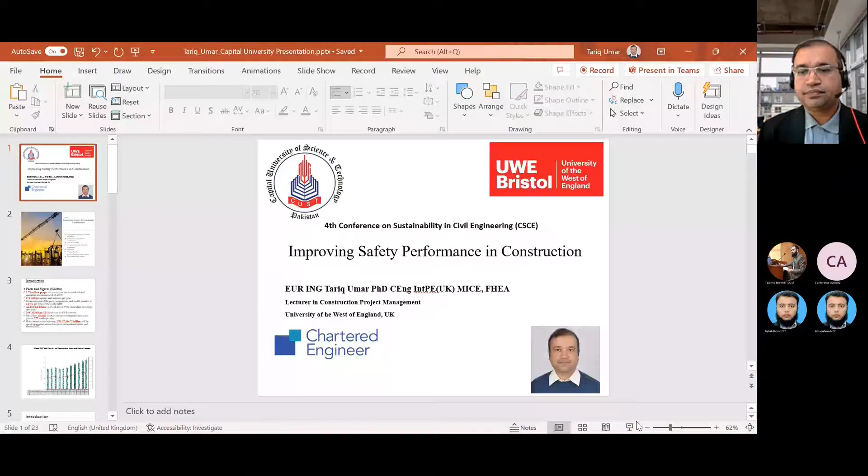So ladies and gentlemen, and the conference organizer, thank you very much for giving me this opportunity to present some of my thoughts in this prestigious conference. I'm going to talk about safety in construction, and the title of my presentation is Improving Safety Performance in Construction. My name is Dr. Tariq Umar, and I'm a lecturer in construction project management at the University of West of England.

So the content of my presentation will include the introduction and the importance of safety and health in construction. We'll try to look at the different causes of accidents in construction. Then I will try to cover the cost of accidents. Then we'll briefly cover the occupational safety and health regulations. Two topics related to heat stress and physical health of workers will be covered. And then later I will cover safety culture and safety climate. And then at the end, we'll have the conclusion and a brief question and answer session.

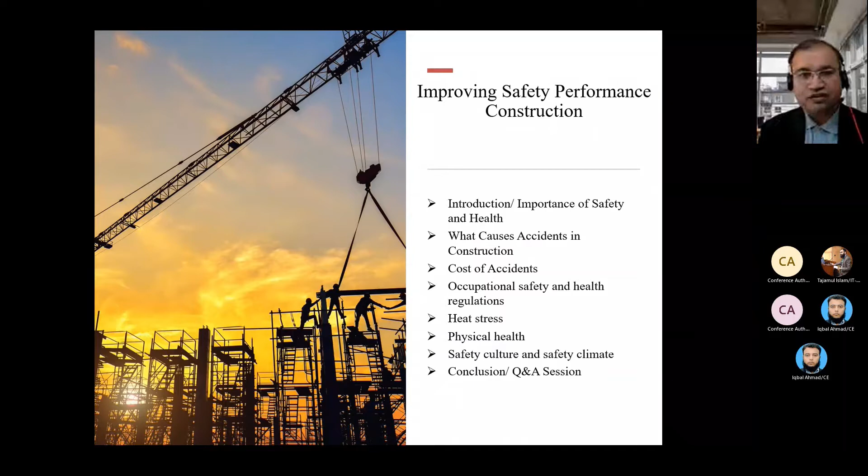So let's look at some global facts and figures related to health and safety in different sectors. If we look at the statistics of the International Labour Organization, that revealed that 2.78 million people die every year due to work-related accidents or diseases. If we look at the injuries, those are basically 374 million per year. If you look at the economic cost of poor occupational safety and health, that is around 4% of the world GDP. If we take the example of Australia, that is 4.1% of the Australian GDP per year.

In terms of the United States, that is more than 3,000 billion US dollars per year. If you look at the number of deaths, statistics indicate that more than 100,000 workers die on construction sites every year, which is equal to 277 deaths per day. If the situation does not change, and if safety performance is not improved, and if the situation remains the same, the cost of safety will be more than 37,000 billion as we go forward.

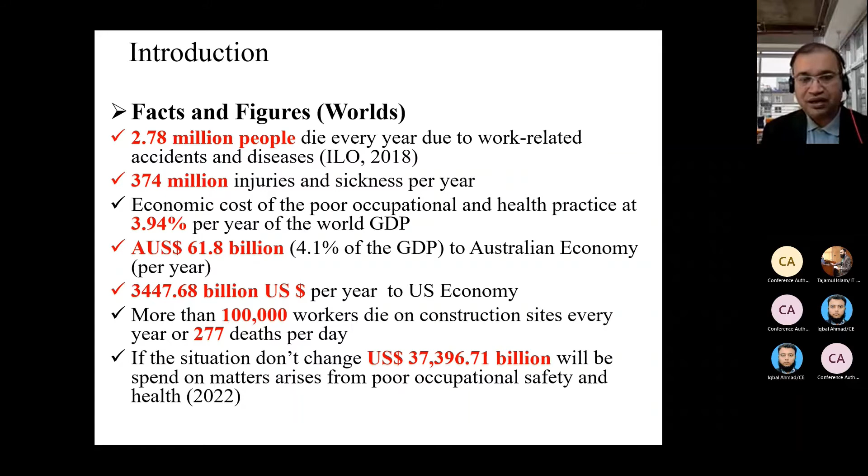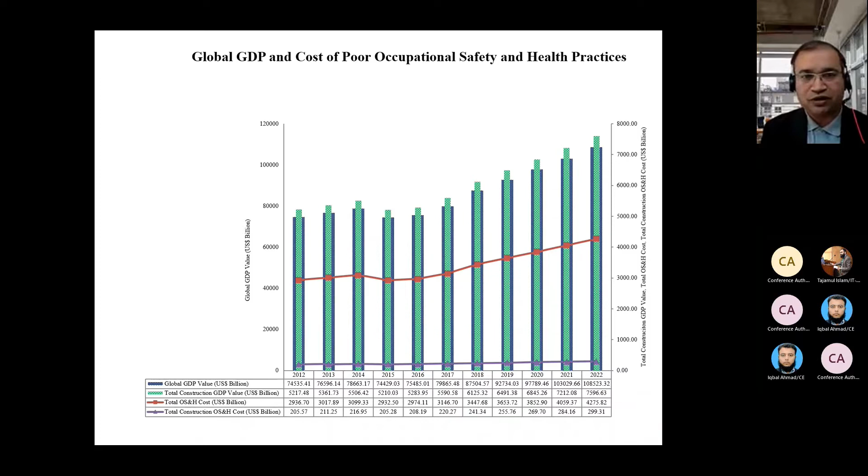So this was based on statistics till 2022. That was the projection, but of course we are in 2022, so the current data is still to arrive, but that was the projection. So if the situation does not change, you can imagine how much the cost will be, and that's why safety and health in construction management is quite important and needs to be given proper attention.

Now, as I was mentioning, I have to cover some topics. So when we say the causes of accidents, why is it important? Because when we know the causes of accidents on construction sites, we will be able to develop strategies and avoid those causes on the construction site. Similarly, the cost of accidents is also important, because when people know how much the cost of accidents is, they will be willing, or encouraged, to invest in health and safety. Likewise, occupational safety and health regulations are important, because we will not be able to achieve perfect health and safety on construction sites without the implementation of robust occupational safety and health regulations.

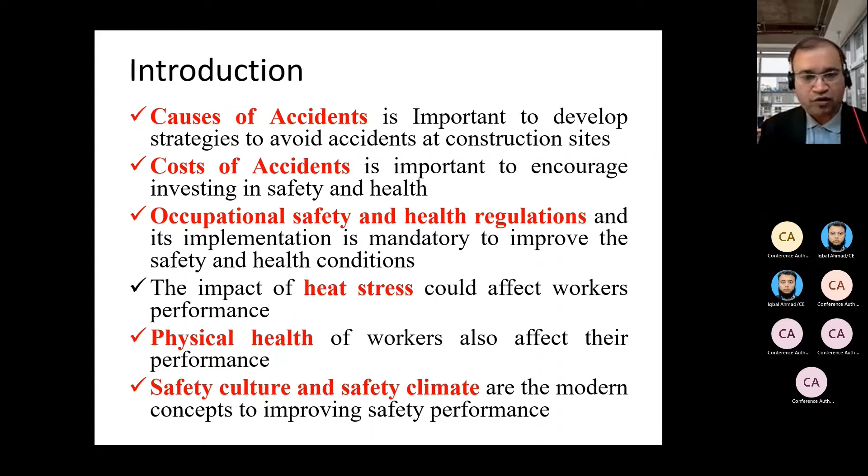Then we also know, if you look at South Asian countries, the temperature in summer is quite high, and that basically results in a phenomenon called heat stress that affects workers in terms of their response process. Their productivity is also reduced, but their safety performance is also affected. So there are some strategies which can be used to protect workers from heat stress. In terms of physical health, if the worker is healthy, then he will not only be productive, but his safety performance will also be improved. In terms of safety culture and safety climate, these are some of the modern concepts which are basically used quite a lot these days to improve health and safety performance on construction sites.

Now let's look at the causes of accidents. What caused the accident? If you look at the United States construction industry, and if we look at the OSHA statistics, the main cause of accidents is falls from height, which is basically 39% of the total accidents. The second one is struck by object, which is 8.23%. Electric shock is 7.31%. And sometimes the worker can be caught between an object or maybe between a vehicle, that is 5.14%.

If you look at the UK construction industry, and if we look at the HSE statistics, again, fall from height is the leading one, which is responsible for almost 27% of accidents. The second category is struck by a moving object or vehicle, which is 18%. The moving vehicle, and then the next one is the moving object, which is 16.3%.

Similarly, there is also a possibility that someone will be trapped by something collapsing or overturning, that is 11.34%. And then the last one is contact with moving machinery, which is 9.21%.

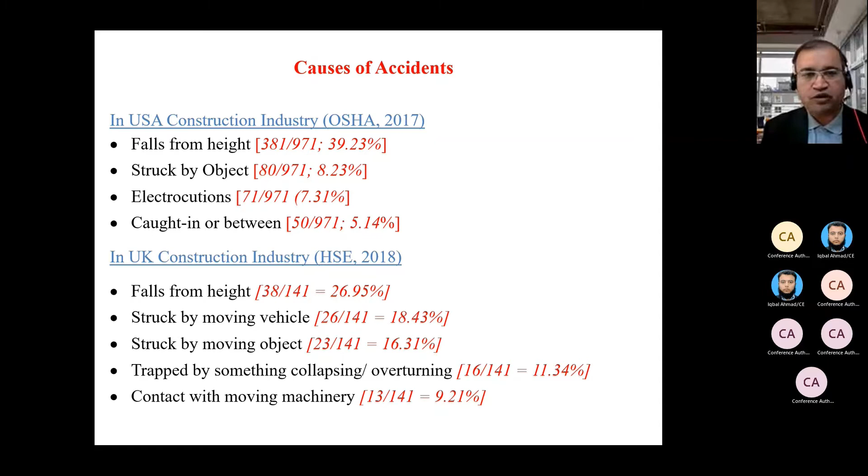If you look at the Australia construction sector, again fall from height is the leading cause, basically 28% of the total accidents. Vehicle collision is then 16%. Electric shock or electrocution is 15%. Then being hit by a moving object is 12%. Falling object is 11%, trapped between or in equipment is 8%, and other causes are 9%.

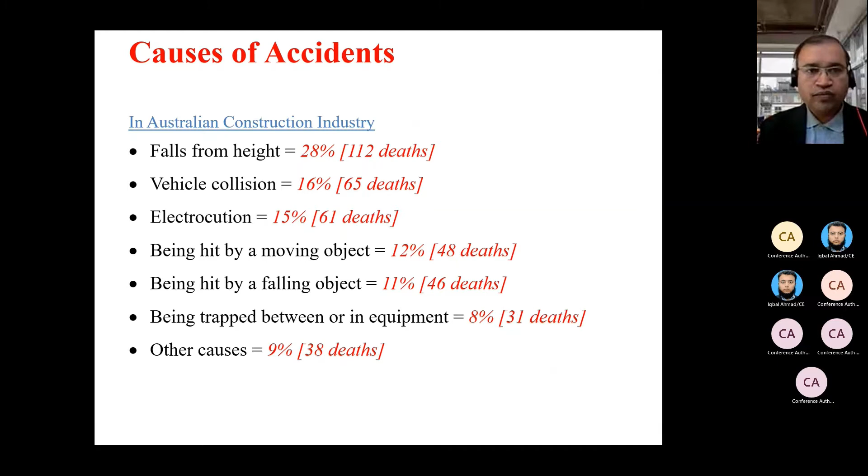So the reason for putting these statistics is that it can give us an awareness of what caused the accident. You see that the main cause, or the leading cause of accidents, was fall from height. Now the problem is that if you know that reason, fall from height, it means nothing basically.

What we need to improve is basically a tracing model which traces the accident to the actual cause. Based on this concept, I have developed a tool which divides the accident into 4 different categories: the equipment or material, the worker itself, the environment, and the management. So there is a tracing model where you can look at different aspects or data collected from the site. It's quite simple to use, and based on that you can identify what basically caused the accident.

That tool has been published in one of my papers. I have provided the link and also the title of the paper. If you are interested, you might be able to take that tool from the paper.

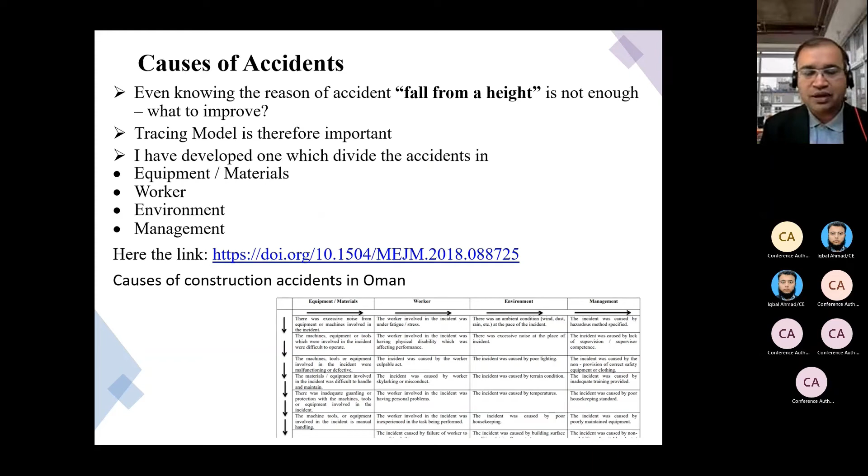Now, what costs the accident? There's quite a lot of cost, but mainly we can divide them into direct cost, indirect cost, and the quality of life. Because when somebody is injured, or let's say becomes disabled, his throughout life will be affected.

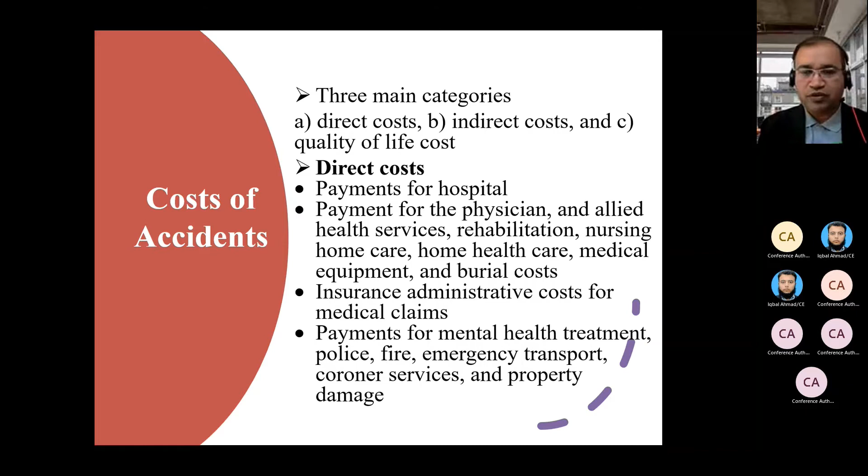The direct cost you can simply define as when somebody is injured, he or she goes to the hospital, so the payment to the hospital is made - that can be classified as direct cost. Indirect cost, because the worker is injured, even if he arrives back to the site, maybe the productivity will not be the same. So that can be classified as indirect cost.

And as I mentioned, the quality of life - if someone was injured and becomes disabled, he will not perform the same way as when he was healthy or perfect. So it will be long life suffering. That is a category which we can classify as quality of life cost.

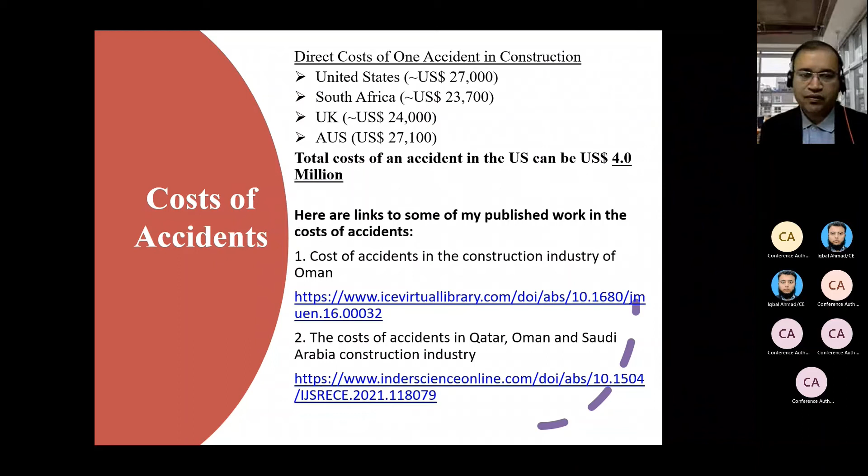As I mentioned, the three categories: direct cost, indirect cost, and quality of life, which is quite difficult to estimate but is also a factor. If we know the direct cost, using statistics we can determine the indirect cost. I have provided some indication of the direct cost of accidents in different countries.

If you look at the United States, the direct cost of an accident is around 27,000 US dollars. In South Africa, it's around 24,000. In the UK, it's 24,000, and in Australia it's again 27,000.

So the total cost, if you look at direct cost, indirect cost, and quality of life, which is quite tricky to estimate - but based on those statistics, considering one accident in the US construction industry, the cost of an accident can be 4 million.

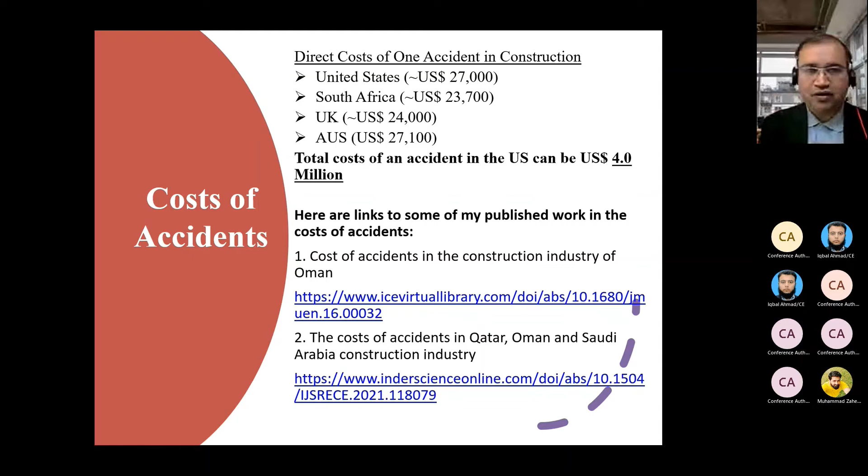I have worked on the cost of accidents in different regions because I was working in the GCC region, so I have estimated the different costs of accidents using various approaches. It's quite difficult and tricky to arrive at an accurate estimate, but there are procedures that give us a rough or appropriate idea of the cost of accidents. I have provided the title of the paper and the web link, so if you want to read further on this, you can follow this title or these links.

Because construction work is basically a physically demanding job, on the construction site the temperature is quite more. And if we look at accidents on the construction site, there is a pattern which tells us what time the most severe accidents take place.

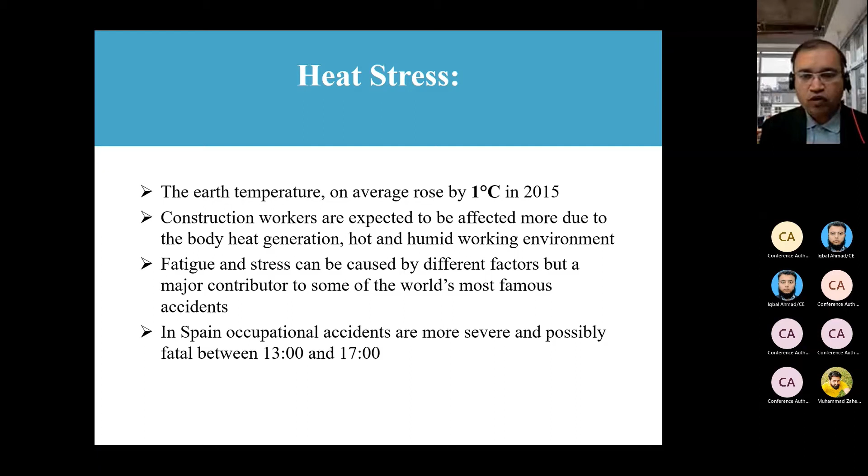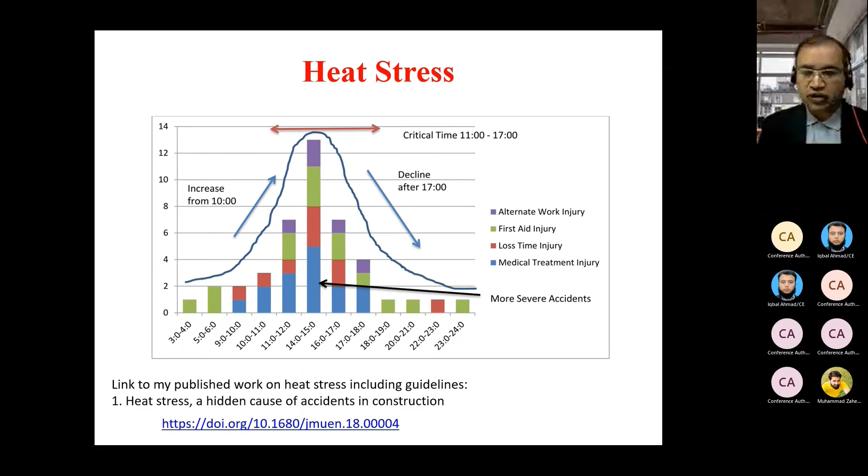I have developed some guidelines which can reduce the effect of heat stress, or how we can protect our workers from heat stress. Again, I have provided the link and the title of the paper.

When it comes to occupational safety performance, regulation is important. If you look at the Pakistan case, there are several legislations made at federal and provincial level, but they basically only cover the basic and general provisions of occupational safety and health.

Since the government is trying to establish the Construction Industry Development Board, they also need to consider occupational safety and health regulation, which will help the industry improve its performance. The construction sector is quite important and expected to grow in the future, which is why the government is trying to establish this board.

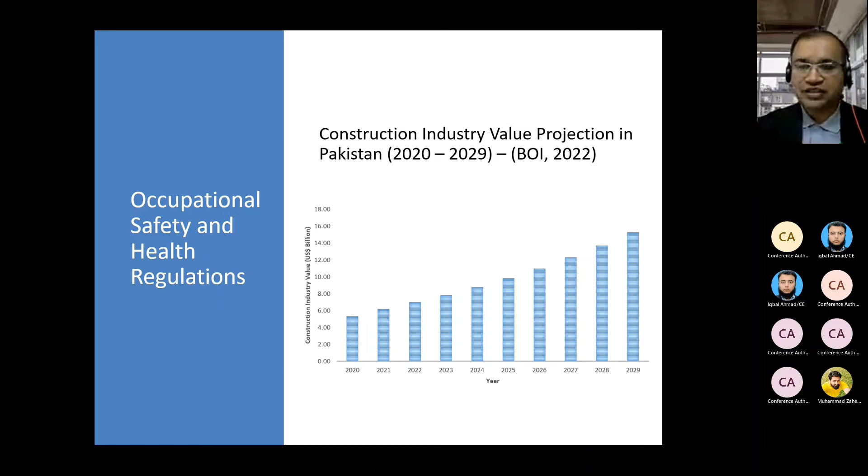I have looked at the projection, and the data I have taken is from the Board of Investment. You can see how the construction industry is heading towards a peak by 2029. If the construction industry is only growing and we don't look at safety performance, that will not be appropriate, because ultimately that will also result in economic losses.

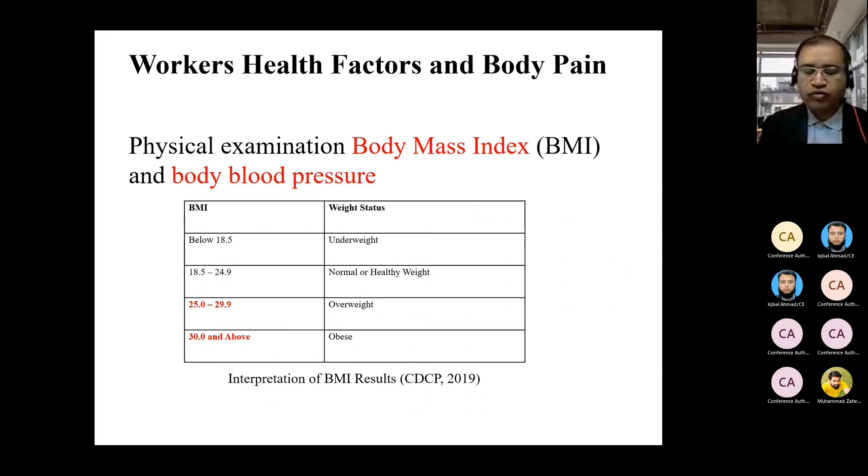As I was mentioning, the physical performance of the worker, or physical health, can be measured with quite simple indicators. You can consider the body mass index, and we can also consider blood pressure. If the worker's blood pressure is high, that will affect their response process.

Why will the blood pressure be high? Because if the body mass index is high. So one of the reasons we have high blood pressure is if we are overweight, and there is a process to control those factors, one of them being a healthy diet.

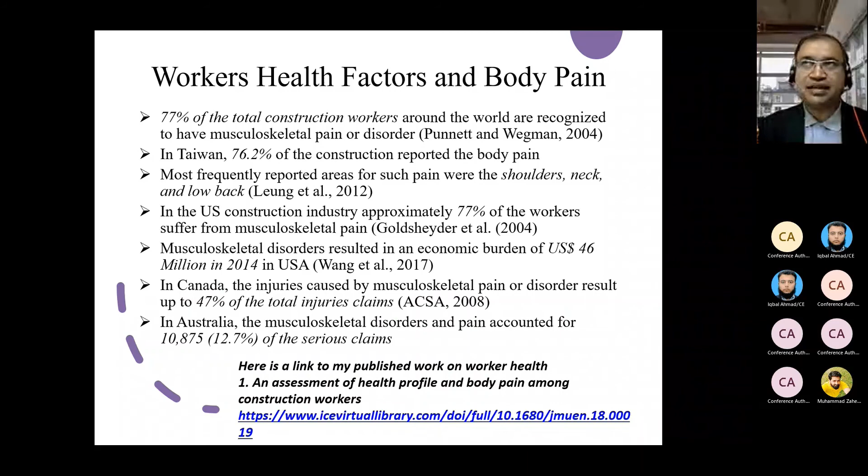I have provided some statistics here. I don't have time to go through them, but I have provided a link to one of my papers in which I have described how to do that assessment, and then based on that assessment, how we can develop strategies to make our workers healthier.

Now the last one was safety culture and safety climate. I would like to highlight three periods, or three ages of safety. The first is the technical period, in 1920, then the human factor period, in 1970, and then the last one is the management system period, in 1980.

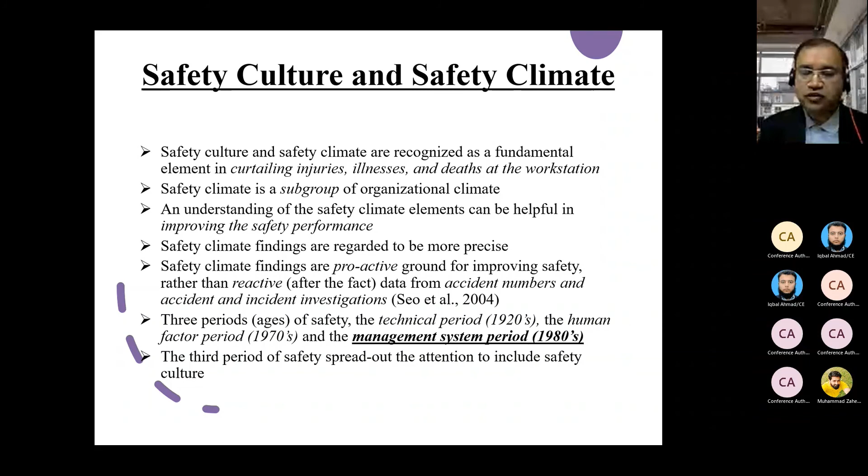The management system period in 1980 basically shifted the focus to include safety culture and safety climate. The safety climate is basically an approach to measure the safety culture, and if the safety culture is reached, there will be less possibility of accidents.

There are several dimensions which can be used in the assessment of safety climate: management and organization commitment, safety training, employee involvement in safety, worker safety behavior, safety communication, safety accountability and justice, supervisory leadership, and safety leadership.

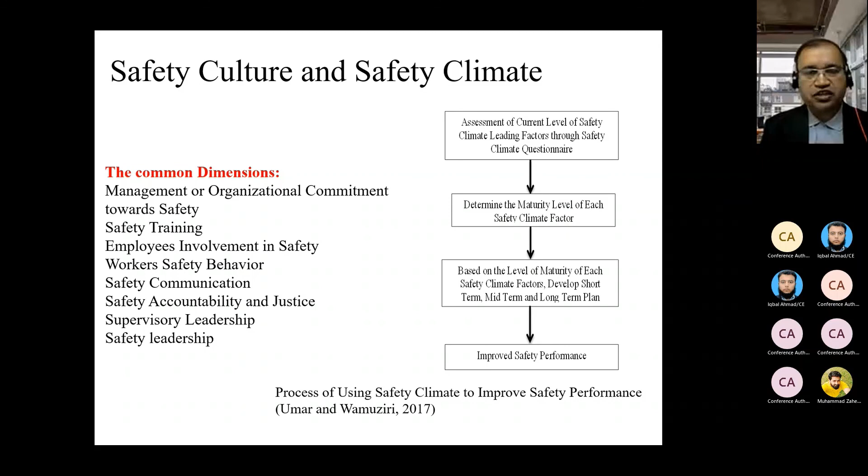We have developed a tool which basically helps us assess the current safety climate and then develop strategies to bring the safety climate to a mature level so that safety performance can be improved.

Just a brief conclusion: there are several ways to improve occupational safety and health. This also depends on the company's capabilities and their capital. For example, small organizations might be interested to know the causes of accidents, while big organizations which have the resources might be able to adopt the safety climate approach.

There are guidelines to reduce the impact of heat stress, and a good diet can also help reduce BMI and blood pressure. At the end, a healthy worker is not only safer but also more productive, which is basically in favor of the construction organization.